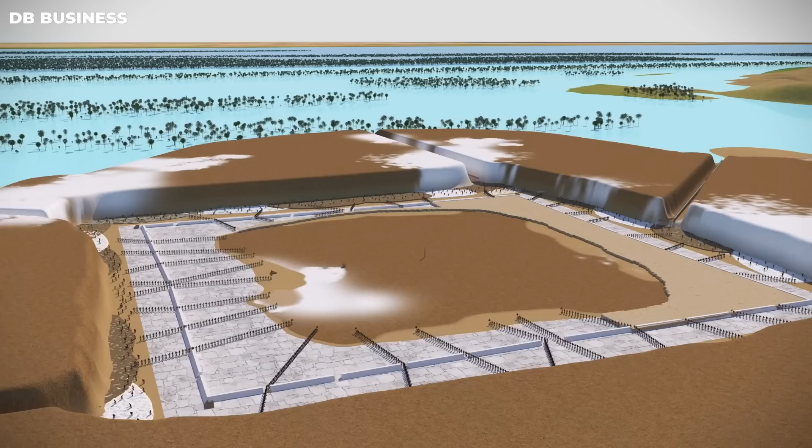The workforce might be further broken down into a permanent crew of around 5,000 paid workers who resided within a well-established pyramid community with their families and dependents. Additionally, there might have been 20,000 temporary labourers who came to the area to work 3 or 4 month stints and lived in a less developed camp that was built next to the pyramid settlement.

According to Hawass, there are no building secrets since the Great Pyramid was constructed using the equipment that was available at Giza at the time. The earliest papyri discovered also openly show the transfer of enormous limestone blocks from the Tora quarry to Giza to construct the Great Pyramid of Khufu.

Hawass believed that carrying the massive stones over wooden beam rails that had been lubricated with gooey, wet gypsum and mud was the most logical method of building.

The Great Pyramid of Khufu is 146 meters tall and 6 million tons heavy. It is composed of approximately 2.3 million pieces of granite and limestone that may weigh up to 80 tons each. However, the blocks are arranged so tightly together that a piece of paper cannot fit between them, and the building is nearly perfectly level and square.

According to his theory, the pyramid was likely surrounded by a ramp made of lime chips, gypsum, and calcareous clay that snaked out of a neighbouring quarry and covered all of its sides.

The pyramid's construction was guided by a line routed by several holes about the size of massive plates, regularly spaced and parallel to the borders of the pyramid. To further guarantee uniformity of development and accurate alignment with true north, markers are also included for the diagonals and the centre axis of the faces.

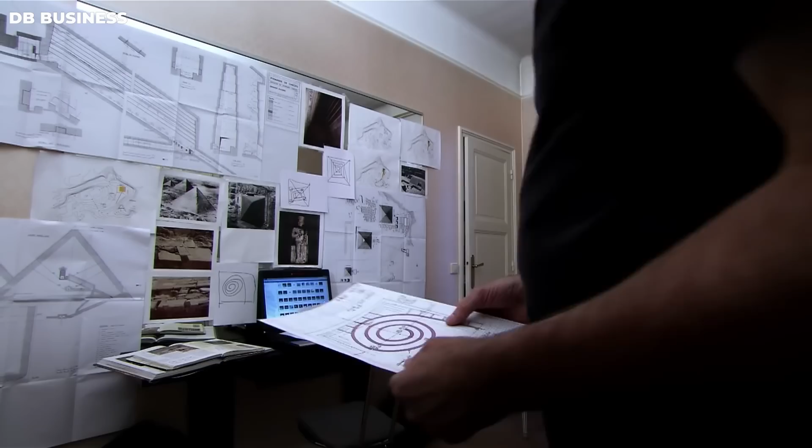Since the 1990s, French architect Jean-Pierre Houdin has devoted all of his study to the Great Pyramid, enabling him to develop the most innovative theory about how the pyramids were constructed.

According to Houdin, the Great Pyramid was constructed using two spiral ramps. The first was a spiral ramp on the outside that climbed about 30% of the way, and the second was a spiral ramp inside that was used to lift the heavy stones the remaining 70% of the way to the top. Each ramp within the pyramid ended at a notch that had been temporarily left open at its edge using Houdin's method. In this 10 square meter open space, a crane hoisted and twisted each 2.5-ton block before preparing it for 8 men to carry up the next internal ramp.

In 2008, Bob Brier, a co-author of Houdin, and a National Geographic film crew explored a mysterious room that could be the start of one of those internal ramps, since it has a notch in the right place.

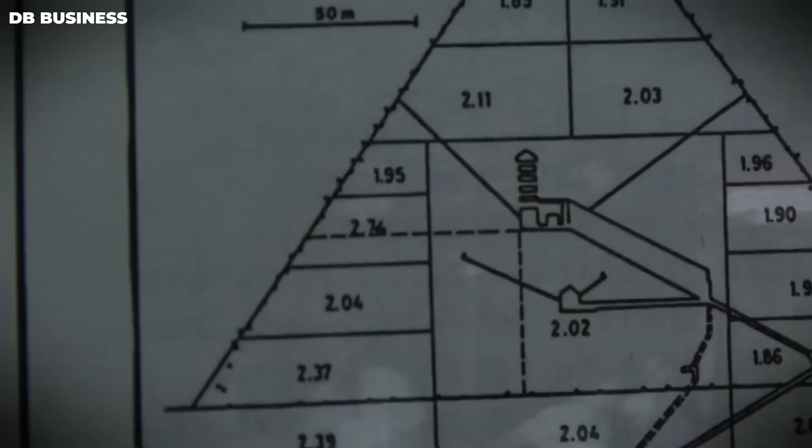Along with the internal ramp, Houdin has been able to explain how the King's Chamber and the Grand Gallery, the Great Pyramid's most mysterious interior, were built. The gigantic granite slabs over the King's Chamber were raised through the Grand Gallery by a long pulley system. As a result, the Grand Gallery fulfills a valuable purpose. Signs within lend credence to this idea, such as hammered holes in the stone. It is said that they help to sustain the pulley system.

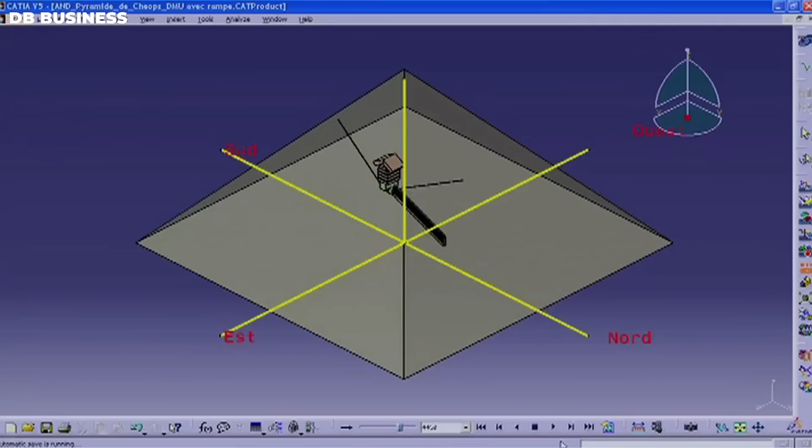The advantages of Houdin's hypotheses are numerous. First, a group of computer engineers was able to verify the concept using digital technology. They confirmed that the internal ramp makes sense and that Houdin's plans for the pyramid match up mathematically. What's most impressive, though, is that they used a low-density scan of the pyramid to extract a spiral-shaped picture to locate proof that a ramp existed. They may be the remnants of an interior ramp. This idea offers the most logical justification for how the pyramids were constructed.

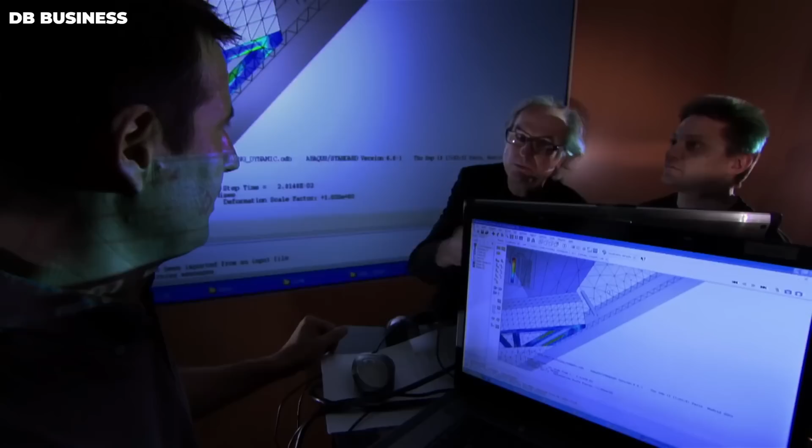The interior Grand Gallery chamber, which otherwise seems to have little use, may finally have an explanation according to another theory Houdin devised using his architectural model. He thinks that the gallery served as a counterweight trolley chute or guide, making it possible to raise the King's Chamber's 5 60-ton granite beams. It has previously been shown by Houdin, Brier and the Dassault team that beam fractures initially shown during construction were tested at the time and were deemed to be reasonably safe.

According to materials expert Joseph Davidovits, the pyramid's blocks were cast like modern concrete and are essentially a sort of limestone concrete rather than carved stone. According to this idea, the valley south of the Giza plateau was utilized for soft mining limestone with a high kaolinite content. Then the limestone was broken into a liquid slurry in enormous Nile-fed lakes.

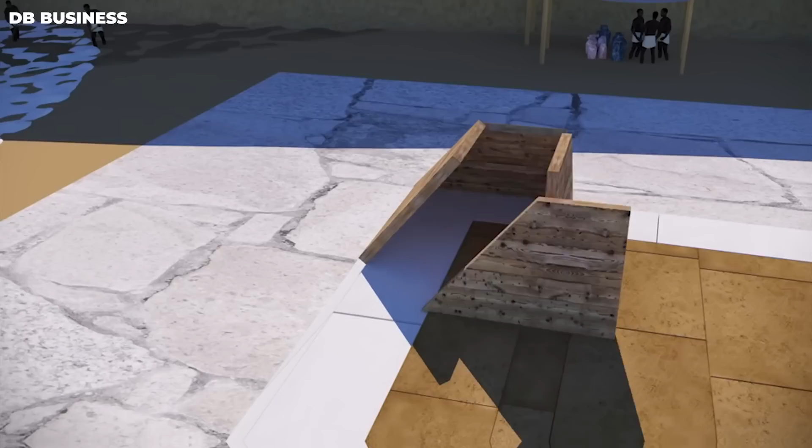Lime, which is present in cooking fire ash, and natron, which the Egyptians also used for mummification, were also included. After that, the pools were left to dry up, creating a moist, clay-like material in their place. This wet concrete was brought to the construction site and placed in reusable wooden molds. After a few days, they underwent a chemical process resembling concrete hardening. He said the new blocks would have been set on top of and against the existing ones.

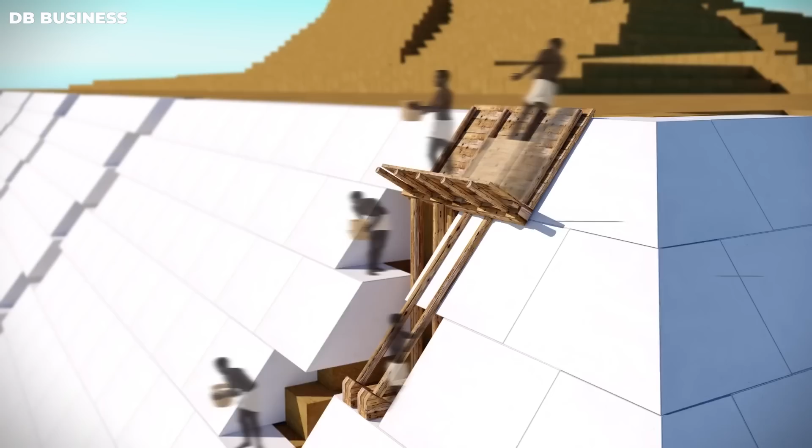Hard-proof testing using comparable materials at the Geopolymer Institute in northern France showed that 5 to 10 individuals could construct 5 blocks, weighing 1.3 and 4.5 tons apiece, in a few weeks, using standard hand tools. He also claims that the famine stele and supplementary hieroglyphic writings explain the stone-casting method.

The vast majority of academics reject Davidovits's strategy. He provides insufficient justification for the granite stones that cover the King's Chamber, which he admits were cut and weigh far more than 10 tons. Geologists carefully analysed Davidovits's technique and determined that his concrete was built from natural limestone collected from the Mokattam Formation.